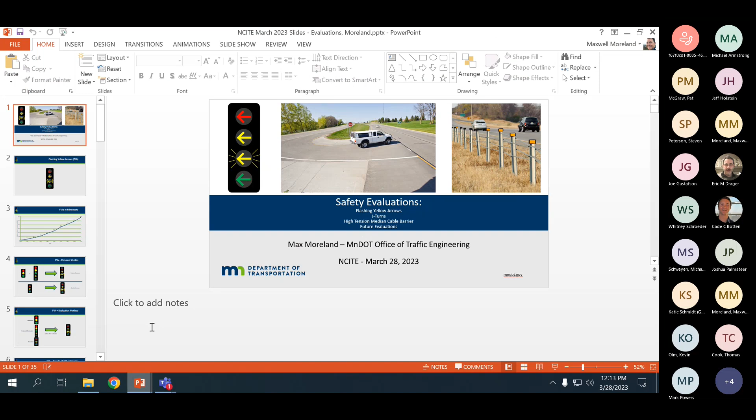Let me know if people say they can't hear it. That's me. All right, I was told no one over there could see, so I'm going to stand right here.

Max Moreland, MnDOT Office of Traffic Engineering, safety section. I'm going to talk about some safety evaluations we've done recently - how we've evaluated the safety of flashing yellow arrows, J-turns, high tension median cable barrier, and some other evaluations we have ongoing and upcoming. It's going to be kind of a rapid fire, just going to go through a bunch of these real quick-ish.

First, flashing yellow arrows - everybody knows what this is, it's a yellow arrow that flashes. Aptly named device, used for left turn phasing, can provide a little more flexibility than maybe a 3-section head can. The thought is that it might have safer operations because it gives clearer messaging to drivers. Green means go, but not always if you're turning left, so it's very confusing for small children. Green means go, flashing yellow arrow means whoa, take it easy.

FHWA authorized the use of flashing yellow arrows in 2009. Obviously, a ton of them have been put in throughout the state.

These are just the ones on MnDOT intersections since then. About half the ones we have are in the Metro District.

Some previous studies have been done on the safety impacts of flashing yellow arrows, and those found two things. Depending on what the signal phasing was before the flashing yellow arrow went in, that would tell you what's going to happen to your crashes. If your previous scenario was just a 3-section fully permissive or a 5-section permissive protective and you went to a flashing yellow arrow, you would see crashes decrease. If you went from a fully protected to a flashing yellow arrow, you would see crashes increase. That kind of makes sense. If you go from a more restrictive signal, where you should only be turning left on green, to giving drivers the option to turn left when there may be oncoming traffic, things are going to happen. When you give people more choices, I guess it's more likely that crashes are going to happen.

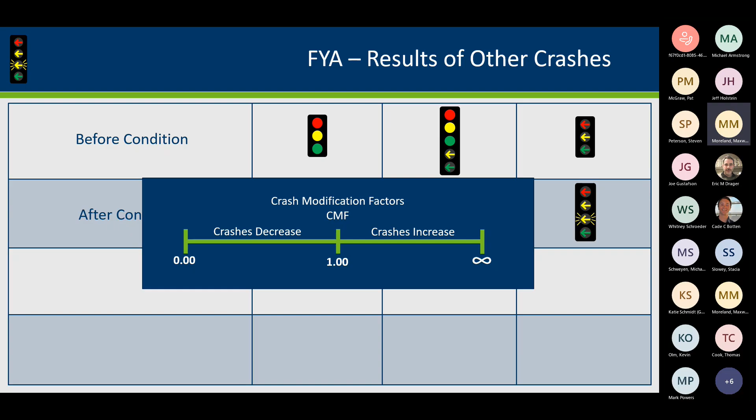So purple pavement, of course, has a CMF of 0.5. That means if you change your road to purple pavement, your crashes are going to get cut in half. That was a fake example. Turquoise pavement has a CMF of 2, which means your crashes are going to double when you change your road to turquoise.

So for left turning crashes, that's the target crash, kind of our focus with the flashing yellow arrow, because we're focusing on those left turning vehicles. The CMF for that is less than 1 when the before condition was the fully permissive or permissive protected, and greater than 1 if it was fully protected. Again, that makes sense, that's kind of what's been seen elsewhere. If you're going from a less restrictive to a more restrictive signal head, you can expect the crashes to drop. If you're going from more restrictive to less restrictive, you can expect crashes to increase.

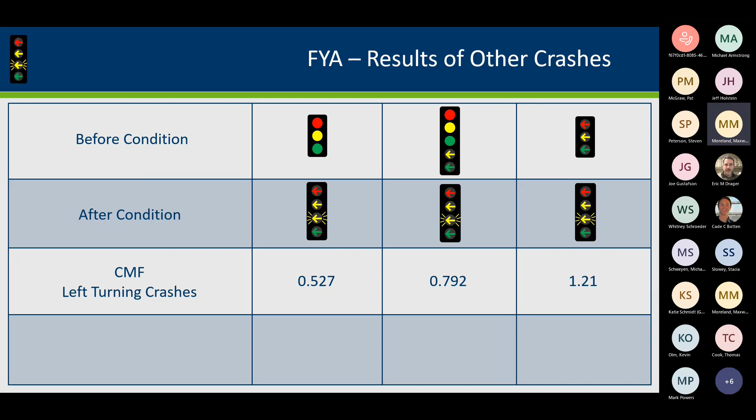Interestingly, with the 5-section head, operations are kind of similar. You had that protective option, you had the permissive option, but I guess the difference is you're not yielding on green, you're yielding on that flashing yellow arrow. So we are seeing a drop in left turning crashes there too. That does seem to indicate maybe there's a clearer message to drivers out on the roads. I know we hear a lot differently from some people—they complain flashing yellow arrows are confusing—but the crash data seems to show that maybe they are sending a clear message to people out on the roads.

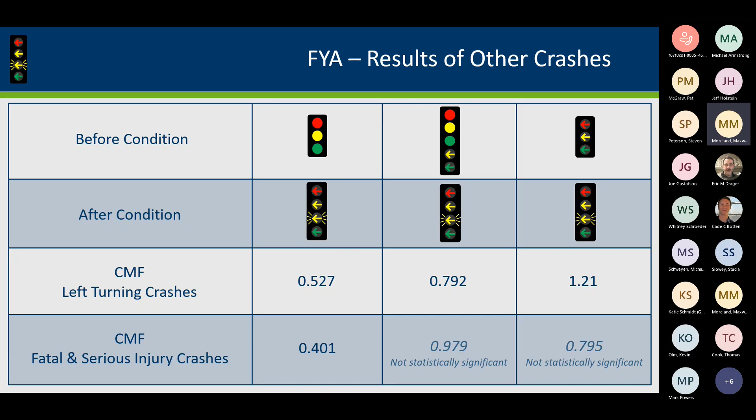And then for fatal and serious injury crashes, we did see drops in CMFs across the board, only statistically significant for the before condition being fully permissive. Those drop pretty significantly, which makes sense, if we're seeing a drop in left turning crashes, that we'd see a drop in fatal and serious injury crashes. You don't want to be in a crash involving a left turning vehicle—head on, angle—usually not a good type of crash. So if we see a drop in that, it makes sense we're going to see a drop in fatal and serious injury crashes. That's the quick summary of this evaluation.

If you go from fully permissive or protective permissive to flashing yellow arrow, your left turning crashes are likely going to drop at the intersection. If you go from fully protected to flashing yellow arrow, left turning crashes are probably going to increase.

So the full report is available. Just Google MnDOT traffic safety reports. There's a web page with every report that we do on there, and this is one of them.

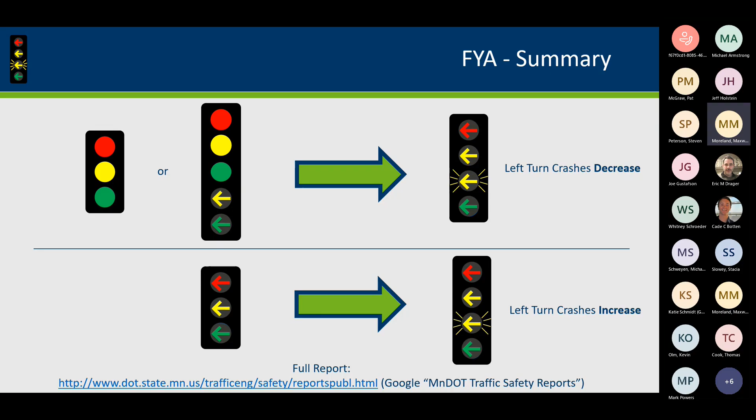All right, so we're going fast here. Next is J-turns. We call them J-turns now, not RCIs, reduced conflict intersections, not R-cuts, not whatever else. All our eggs are in the J-turn basket. So call them a J-turn wherever you go, because it was getting confusing having all these names for this relatively new intersection.

So these are an intersection, a specific intersection type on high-speed multi-lane expressways with wide medians.

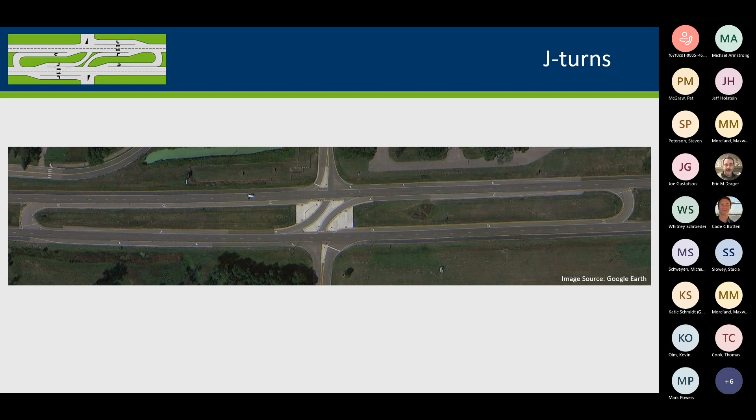The goal of a J-turn is to prevent severe angle crashes. So here's an intersection before and after a J-turn was installed.

You can see with the J-turn there's some obvious differences as far as the movements that vehicles can make. Mainline can still go through without stopping. They can still turn right. They can still turn left if the left turning bays are provided.

They might not be. Some J-turns just have the U-turns. But then minor street, everyone has to turn right. So if you want to go to the right, you turn right. That makes sense. If you want to go through or left, you've got to turn right and then make a J-turn.

Turn your head, it looks kind of like a J, the way the line goes. So if you want to go through or left, you got to turn right, go to the U-turn, come around. So the side street traffic is not making those straight through or left movements.

So they're not opening themselves up to be T-boned basically by high-speed traffic. You're only dealing with one direction of mainline at a time. It's a little bit easier to do.

You do have further to go, but we're seeing on average travel times aren't really changing that much, because you don't need that magical gap in both directions of mainline. You just deal with one gap at a time and you can get through pretty smoothly.

At the conventional intersection, some people would try and make a two-stage crossing here, but we saw a lot of issues at this. There's a lot happening at that point in the intersection. Sometimes people would hang out a little too far or other vehicles would try and turn, so it's messy. The J-turns kind of clean that up, simplify it a little bit.

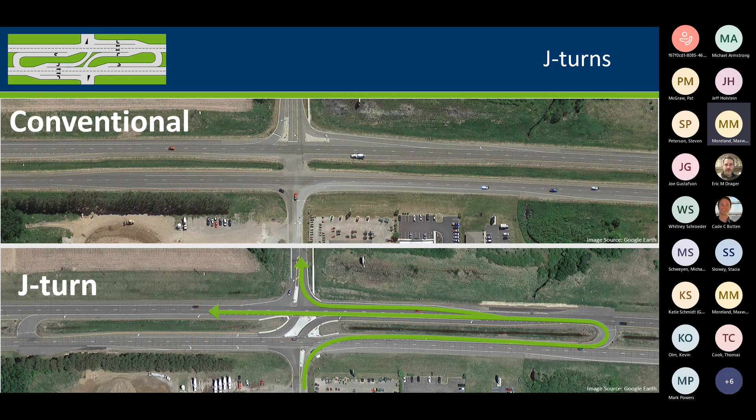The other alternative to a J-turn is an interchange, but that costs a lot of money. That takes a lot more land. You can put 10 or 20 J-turns out for the cost of an interchange. So with the J-turn we can really get more bang for our buck. Limited funds to go around, so we can put a lot more of these out than just one interchange.

The first J-turn in Minnesota was installed in 2010. Now we have over 80 of them on MnDOT roadways. Over 20 were built just last year, kind of all over the state. There's a mix of 3-leg intersections and 4-leg intersections.

We do have one that's signalized on Highway 65 in East Bethel, I think. Yes, signalized, that actually has dual U-turn lanes on it. Some of the J-turns have both of the mainline channelized lefts. Some just have one, some have none. Everyone's got to go to the U-turns.

The U-turns can be as close as a few hundred feet. Usually they're 700 or 800 feet away from the minor street. One of them is almost a half mile, just because there's a bridge and some other things.

Mainline ADTs that we have these on range from just a few thousand, all the way up to over 40,000 on the mainline. And side streets are between just a few hundred vehicles a day, all the way up to 7,000 vehicles a day. So there is a wide range of locations that J-turns seem to be operating decently on.

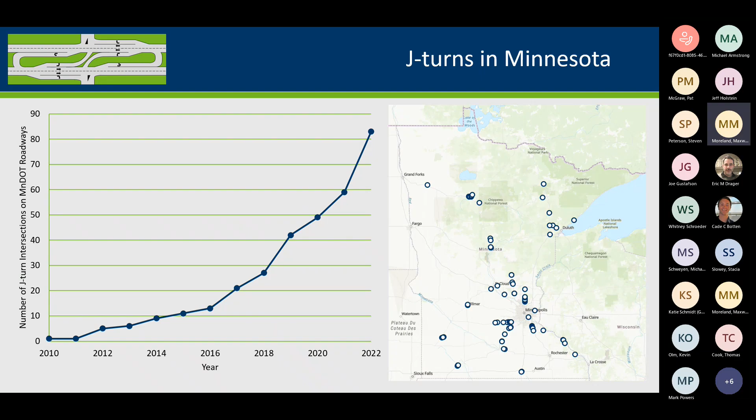So the goal of J-turns is to eliminate those high-speed angle crashes. The purpose of our evaluations was to see, well, is that happening? Are we seeing less angle crashes? Are we seeing less severe fatal and serious injury crashes?

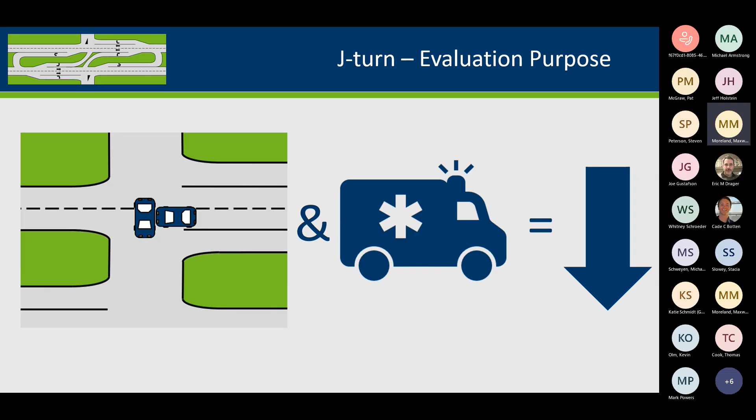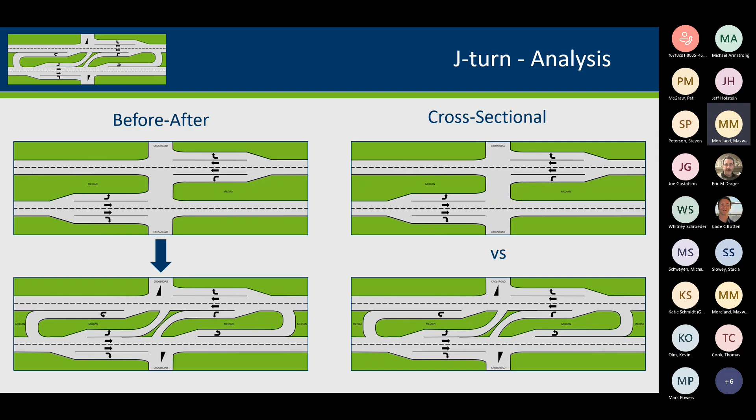So we did this evaluation in-house in my office. We did two types of evaluating: before and after, looking at locations that had a J-turn and comparing crash rates before and after it was installed. Then we also took those before and after results and compared them cross-sectionally to comparison sites that don't have J-turns installed, just other high-speed expressways with side street stop.

They're doing their job out there. Total crashes maybe dropped a little bit, not really, not a big drop in all your crashes, so it's not going to fix every issue you have out there. But we're seeing more of a severity shift, getting rid of some of these more high severity crashes, and there might be some less severe crashes, which from a safety perspective is okay.

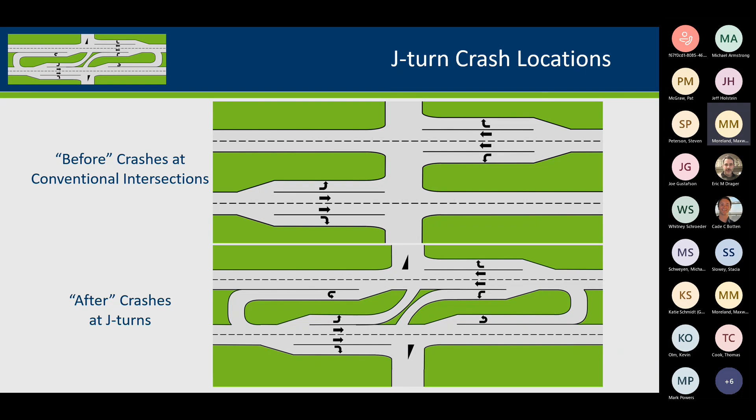So we're still having crashes at J-turns. I just want to talk real quickly about what crashes we are seeing out there. This would just be a comparison of the crashes from our before-after analysis. On top is the crashes we had in the before period, on the bottom is the number of crashes in the after period, for just a few crash types. These are just crash counts, not rates, so don't take this as gospel. This isn't a perfect comparison, but our locations are the same, the time periods before and after are the same, so it just kind of paints a picture of what we're seeing out there.

Another place where we're seeing a decent number of angle crashes is that mainline left turn. A lot of the J-turns still have these channelized left turns, which kind of still opens people up to being hit by a vehicle as they make that left turn movement, similar to the conventional intersection. So we're seeing similar numbers there. J-turns don't have to have these channelized left turns - it could be eliminated, so you'd eliminate this crash type, and anyone wanting to make a left from the main lane would have to use the U-turn.

Slightly more inconvenient - J-turns are sometimes a hard sell for a local community. Even though we have a lot of them and they're working well, it's different. So to get people on board with the J-turn in their community can be a challenge sometimes. So it could be a compromise to keep these left turns in. It has the appearance of less inconvenience for drivers, but it does pose a safety risk. So let's keep that in mind. You can get rid of them all.

But the biggest change we're seeing is side street vehicles attempting throughs and lefts nearly eliminated - those angle crashes. In the before period, over 100 crashes of this type; in the same amount of time in the after period at the same locations, we had 2. So people on the minor street at a J-turn are supposed to turn right. Not everybody does - some will try and take a shortcut, go the wrong way through the left turn. Sometimes people are maybe a little confused about what's going on, so we still do see a couple of crashes of that type. But if you remember another thing about what I talk about, it's that we're seeing a near elimination of this type of crash, which is a severe crash.

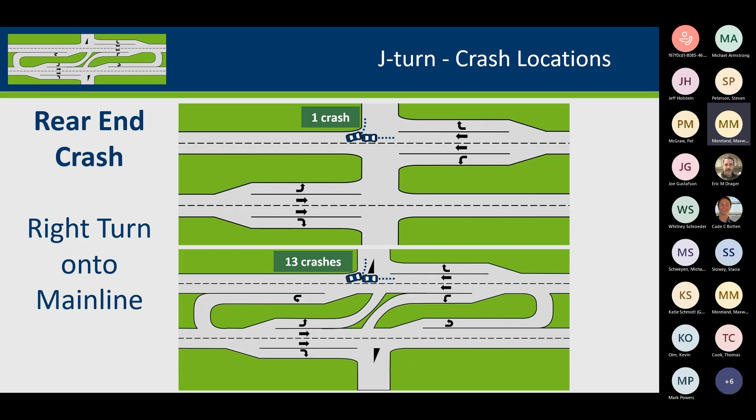With the J-turn, you're only dealing with one direction of mainline traffic at a time, so you're maybe less likely to be scanning, looking for gaps in both directions. It seems more people are just kind of looking downstream, assume the car ahead of them went when they didn't, and then they inch forward and crash into them. So these are all low speed, low severity crashes. We could have 5,000 of these crashes, and I think it's okay.

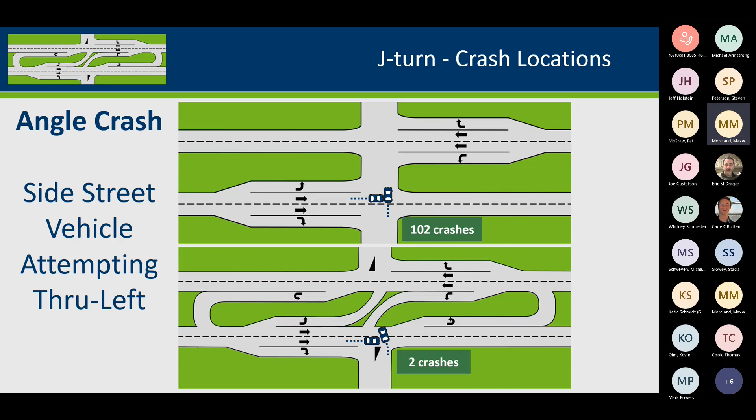Because we're getting rid of these crashes, to get rid of these and have a billion of these, whatever, that's fine. It might make the J-turn sell a little bit harder, but we're not seeing any injuries from this type of crash. But this is something that's kind of causing our total crashes to not be eliminated or not drop much at the intersection.

So summary: angle crashes, fatal and serious injury crashes at J-turns are going down. They're working as expected, which is good. The reports are on the same page, just look for MnDOT traffic safety reports.

All right, go fast. High tension median cable barriers is the next one I want to talk about. These are barriers made out of cable under high tension in the median - metal ropes supported by posts in the median. The goal is to prevent those cross median crashes. As of now, we have 774 miles of these throughout the state on MnDOT roadways. So a lot of them, I'm sure you've seen some of these driving around.

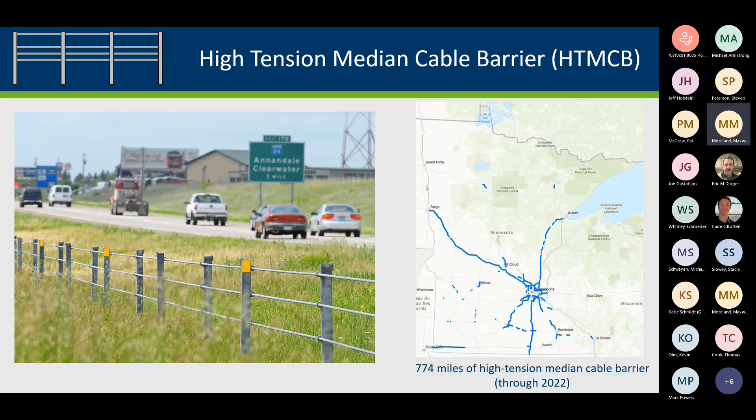So the goal is to prevent cross median crashes. When a vehicle enters the median, that cable barrier is there to stop them from going into oncoming traffic. Those cross median crashes are severe - they're head on, they're high angle, they're high speed crashes. They're never good, so you don't want any of them. So the cable barrier is there to stop that.

So when the barrier is there, it'll catch the vehicles before they can enter that oncoming lane. It's a flexible barrier, so it has greater deflection than a rigid concrete or semi-rigid guardrail barrier. It transfers a little more energy away from the vehicle into the cables, resulting in a lower severity of crash when people hit these barriers. And the cables kind of dig into the vehicles - they don't just slingshot the cars back into the lane they came from.

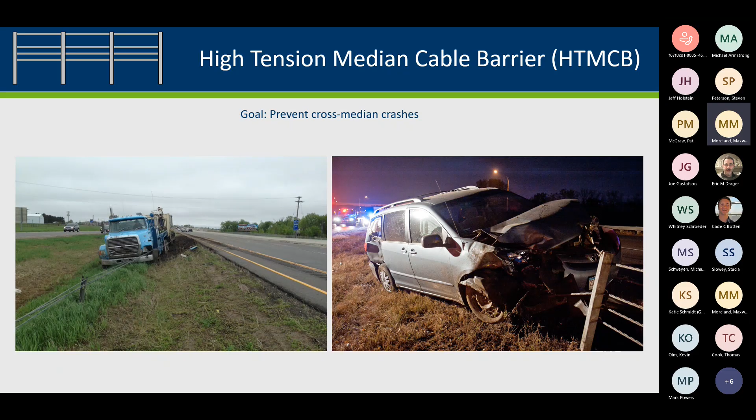When a vehicle hits a cable barrier, they're going to get snagged, they're going to get snarled. You can kind of see they'll get stuck in the barrier there. Once they get there, they're generally going to stay there, which is a nuisance from a maintenance perspective - there's more work to be done, but it's keeping the vehicle in the safest spot right there.

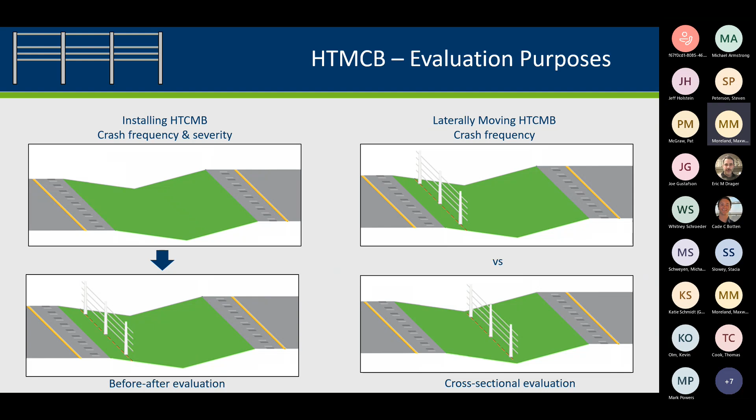So our evaluation looked at two things. First was what happens to crash frequency and severity when you put barrier in a median that did not have barrier before - we did a before-after evaluation looking at that. Then also what happens to crash frequency when the barrier is in different locations in the median - if it's right up on the shoulder close to vehicles, or way down in the middle of the median further from vehicles. So we did a cross-sectional evaluation comparing locations with different barrier offsets against each other. This evaluation was done by HDR with our traffic safety evaluations contract.

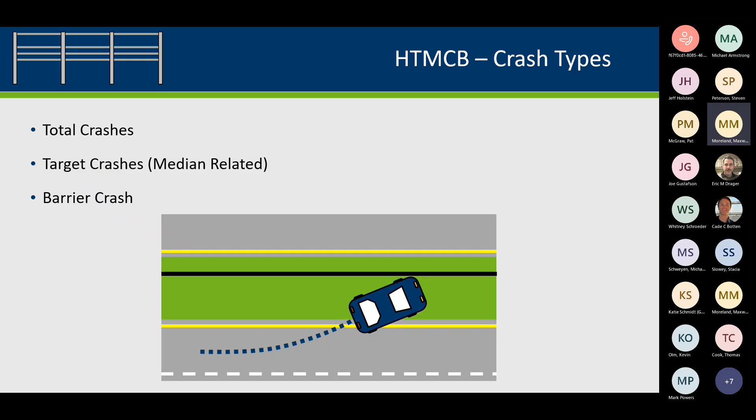We grouped all the crashes into three bins: total crashes, any crash happening on the segment whether related to the barrier or median or not; target crashes, crashes that involved any vehicle entering or crossing through the median; and barrier crashes, any crash that involved the vehicle striking the median barrier.

So the results of installing new barrier on a location that did not have it before: for total crashes, we're seeing a pretty healthy drop in fatal and serious injury crashes, same with fatal and all injury crashes. So it does seem that putting in that barrier prevents some of those cross-median severe crashes. Overall, total crashes are going up - CMF's greater than 1. You're putting something in the median that wasn't there before, there's something for people to crash into, and moths to a flame, people are going to hit it. So there's going to be more crashes than there were before. That's a nuisance, that's a pain, but we are getting that drop in fatal and serious injury crashes. So everything's a trade-off here - I guess I'd say it's worth it from that perspective.

If we look at just the target crashes - crashes that involve a vehicle going into the median - there's a big drop in fatal and serious injury crashes. CMF of 0.377, that's a 62% decrease in fatal and serious injury crashes. So if you drive your vehicle into a median and there's a barrier there, you're 62% less likely to be killed or seriously injured. There's a big drop in all injury crashes, and again a big increase in all crashes because there's something to hit that wasn't there before.

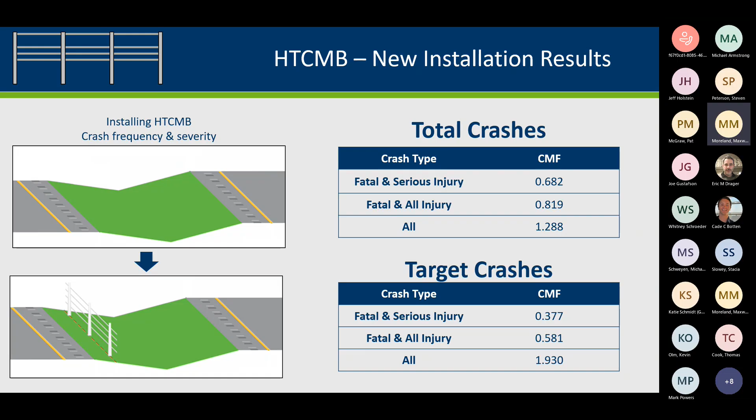But that's a trade-off we're seeing good drops in fatal and serious injury crashes with these barriers, which is why we have so many miles of them throughout the state.

The second portion of our evaluation was looking at how changing the offset of the barrier, the distance from the vehicle travel lane, changes crash frequency. So we've got three lines and three equations, one for each crash type: total crashes, target crashes, and barrier crashes.

If we just look at this dark blue line, that's total crashes. As the offset increases, the CMF decreases. So as the barrier gets further away from the travel lane, there are fewer crashes. That seems obvious, we kind of knew that, but now we know how fast that rate changes for our different crash types.

So now that we know the expected crashes at different offsets, we can develop CMFs. That's what these equations and this table give us numbers for, so we can do comparisons. If we're looking to place the barrier, we can look at different locations in the median, compare estimated crashes at different locations, do a cost-benefit analysis, and see what the best spot for putting the barrier would be.

So we're just making it more complicated. You just want to put out a barrier, seems simple, but no, you've got to do math. Hopefully this will make it a little bit safer out there, with fewer crashes depending on where you want to put the barrier.

This evaluation did not analyze ground slopes of medians or anything like that. Based on the slope of the median, there's only certain places you can put the barrier, because it's possible it's in the wrong spot. A vehicle leaving the road could shoot right over the barrier, or compress down and go under it, overriding or underriding the barrier. So there's only certain spots you can put a barrier.

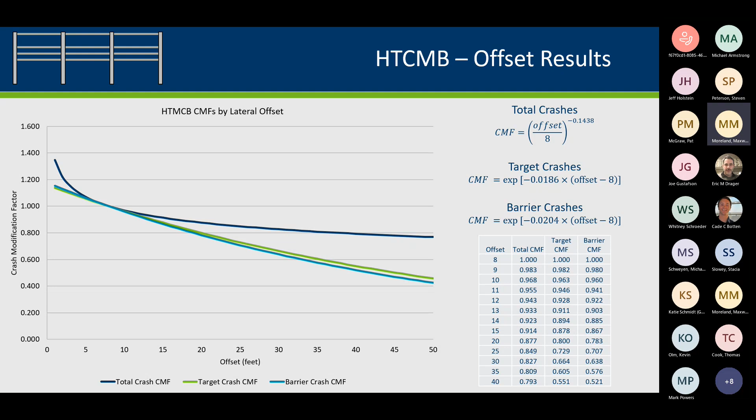These calculations can help you pick the best spot, and even tell you if it's worth regrading the slopes. It's worth doing that extra work if you're going to see significantly fewer crashes.

This was just a quick example of how to use those numbers. Say you had a barrier that's 10 feet away from one side, 50 feet from the other side, and a 60-foot median on this fake road. You could estimate with that volume and this length of segment, in 10 years you'd have this many crashes. And if you move the barrier, you can just estimate how many crashes you're going to get.

So I'm not going to run through that right now, but you can read about it on the MnDOT Traffic Safety Reports webpage. So that's high tension cable median barriers.

Now, just a couple minutes left. I want to talk quickly about some other evaluations we have ongoing. Just a teaser, I don't have any results, so don't ask me about these. These are things we're working on now, stuff you'll see upcoming in the near future. But hold us accountable, because now I've mentioned that we're working on them.

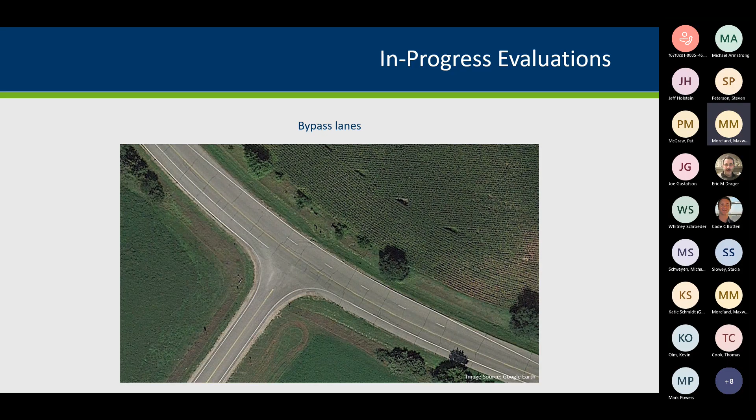First is a bypass lane evaluation. Mara started this, I believe, when she was in our office. Then when she left, it just gathered dust. So we're going to dust it off and get it out there.

What are the crash impacts of bypass lanes in urban sections? This is a wide-reaching scope of a project, comparing 2, 3, 4-lane undivided, and 4-lane divided urban facilities. What kind of safety performance are we seeing on these different types of roads in urban areas, with and without bypass facilities, different speed limits, different ADTs. So it's kind of a messy project, but hopefully we'll get some results out of that.

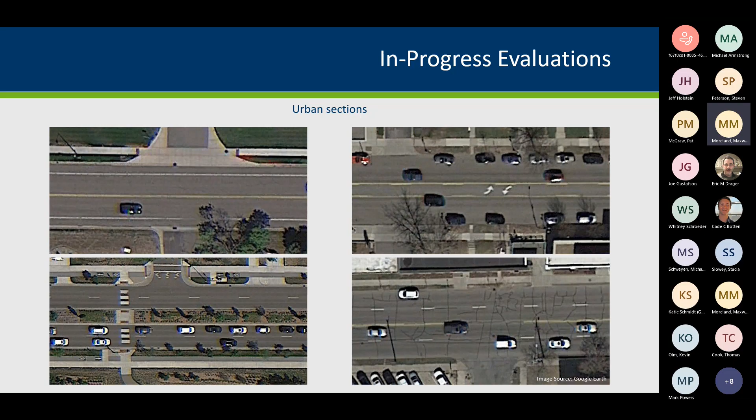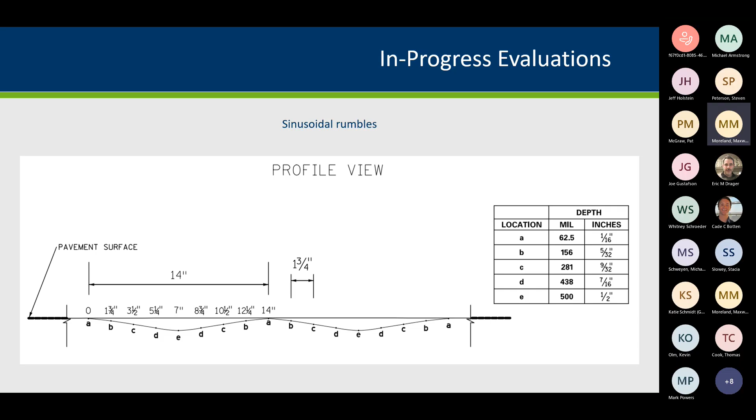We've been putting a lot more sinusoidal rumbles out. Those rumble strips are quieter when the vehicle hits them. So we want to see, now that we have a bunch of them out there, are they as effective as the rectangular rumble strips or not? That one's just getting started.

An update to our 55 to 60 mile an hour speed limit evaluation. Between 2015 and 2019, per legislative request, MnDOT studied a whole bunch of 55 mile an hour speed limit roads to see if they should be raised to 60. As you can see, red remained 55, green raised to 60. So thousands of miles of road, we did change the speed limit on.

So we did a study a few years ago looking at what the speed impacts were. Not much, the 85th percentile didn't really change, average speed changed a little bit. And then what were the crash impacts? They were kind of minimal, but we have more years of data now. COVID happened, so that threw another wrench in everything. So we're going to take another look at that and see how operations are on those roads.

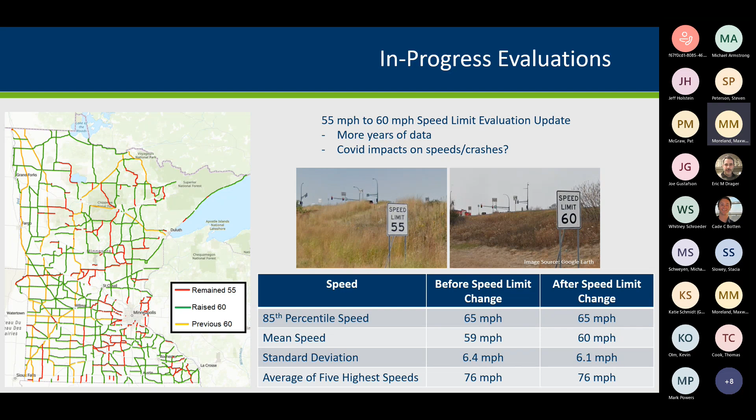Signal backplates with retroreflective borders, the yellow strip on signal heads. In 2019, we put these out on about 100 MnDOT intersections. FHWA says that's a proven safety countermeasure.

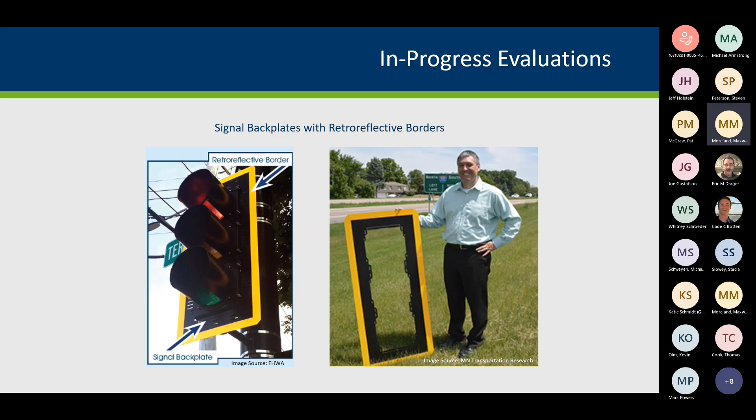The thinking is it'll just get drivers' attention a little bit more. Say, hey, look at me, there's something up here to pay attention to. So we've had some of those out for a few years, and we're going to take a look, see if they're working from a crash perspective.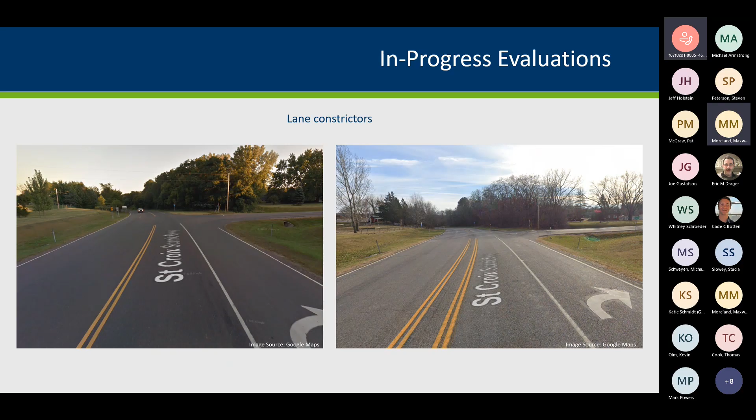Lane constrictors. We put a bunch of these out in 2019 as well, on side street stop control intersections. The main line has a little painted buffer, with some rumble strips down the middle to signal to drivers on the main line as they enter the intersection that their lane is being constricted. One of the goals is to get people to try and slow down, improve safety at the intersection. So we put a bunch of those out, and we'll take a look at that, see how they worked.

And then we're going to do an update to J-turns. We have a lot more locations, a lot more years of data, so we'll do an update to that. And that's all I have.

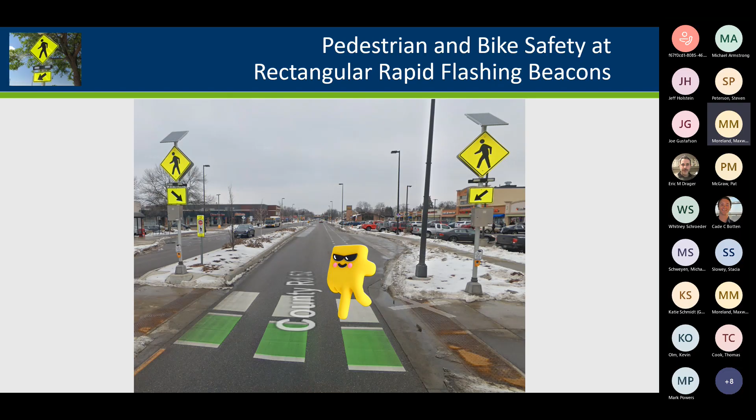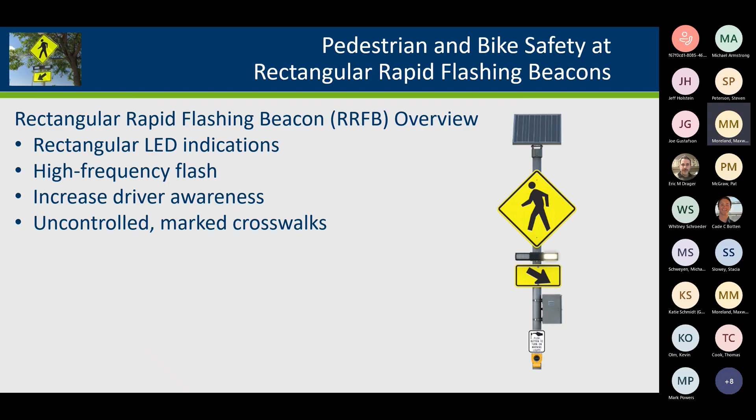So I think y'all are pretty familiar with an RRFB. This is actually the RRFB itself. That bar right between the warning signs has a high frequency flash, their LED indications. They're supposed to make drivers more aware of the pedestrian crossing. They're really intended for uncontrolled marked crosswalks.

This is my first foray into animation with PowerPoint slides, so there's more, and it's out of order, but yielding rates and safety benefits. Pedestrian crashes, according to FHWA, went down after the installation of these. Yielding rates have ranged from 98% to 19%, and of course, that was in Texas. That also varies by speed limit, number of lanes, time of day, and then the crossing distance too.

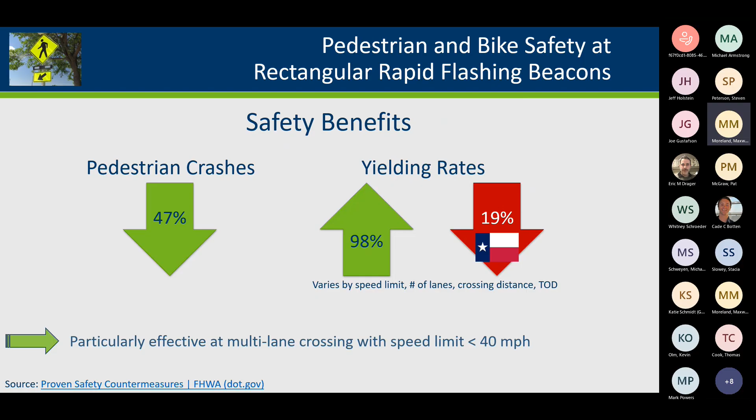I've seen RRFBs at 5-lane undivided sections. It seems like a horrible application for that technology.

These have kind of come from an interim approval that was requested by FDOT back in 2008. And then eventually there was a claim or a patent on the technology, a big MUTCD no-no. My understanding is that they terminated IA-11. A private company bought the patent and then vacated it so it could be in the public domain. That's the last I heard. Anyways, RRFBs are back in the public domain. They have a new interim approval, and they're probably going to be in the MUTCD soon. But for now, that's the interim approval we're working with.

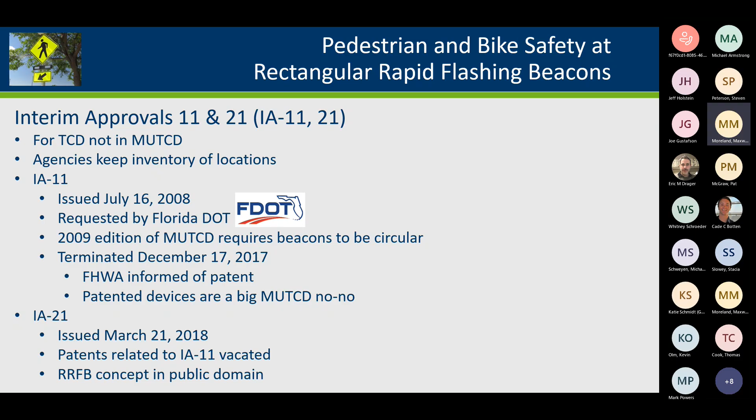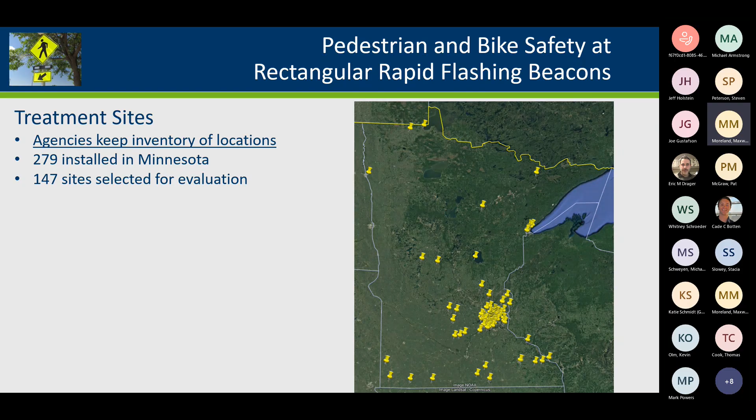And one of the keys about interim approvals that helps with this evaluation is agencies have to keep a record of locations. So we had 279 of these to pull from. We picked 147 sites for the evaluation. On the map, they're kind of all over the state, more concentrated in the metro, but we have a pretty good mix of outstate and urban areas.

Control sites, we tried to match the same number, really similar characteristics. One of the keys was intersection type where applicable, and then the presence of pedestrian signing and markings. So we wanted to compare these not to totally unmarked crossings or unsigned crossings, but ones where the signing and markings are there, but not the RFB.

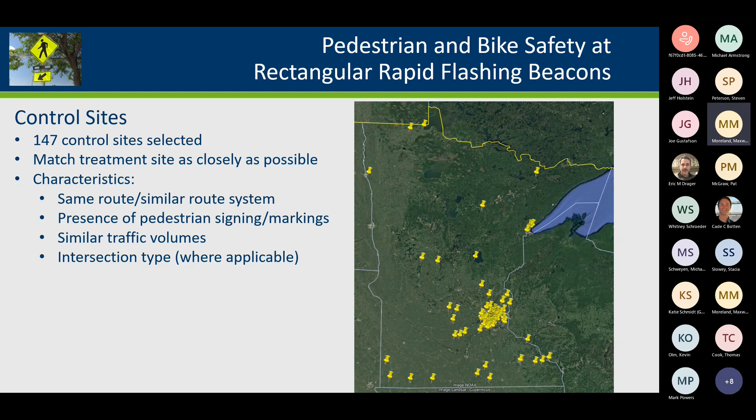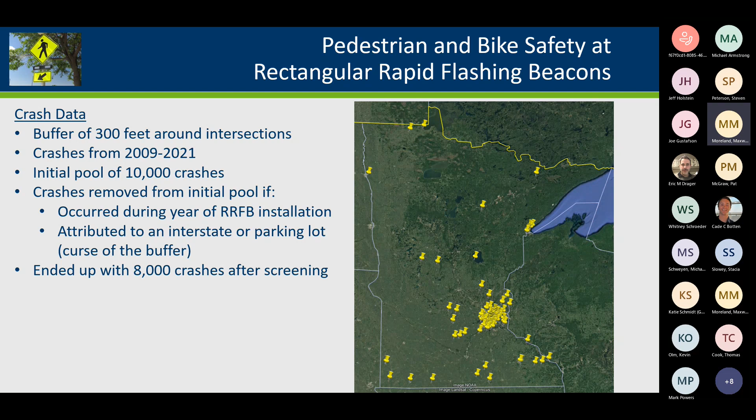So for some of the crash data, we just used a 300-foot buffer around intersections. One of the curses of that is that we grabbed some crashes that were in parking lots or on the interstate. Obviously, there are no RRFBs on interstates. So after we screened those out, we had about 8,000 crashes left to pull from.

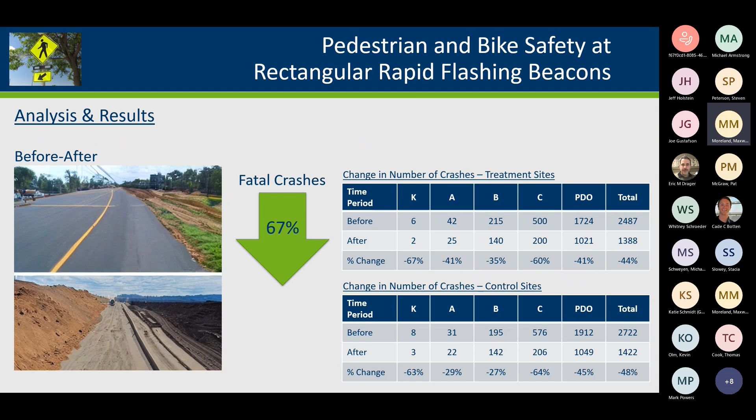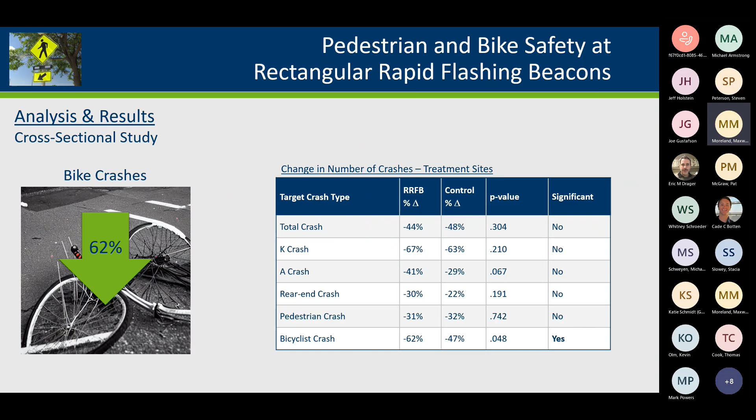But the biggest finding was that at the treatment sites, fatal crashes went down by 67%, and that's all users, not just pedestrians. Seems weird that we would include all users, but that's what happened. Bike crashes were the only statistically significant reduction, though. Those went down by 62% compared to 47% at the control sites. That's another OpenAI image of a bike crash.

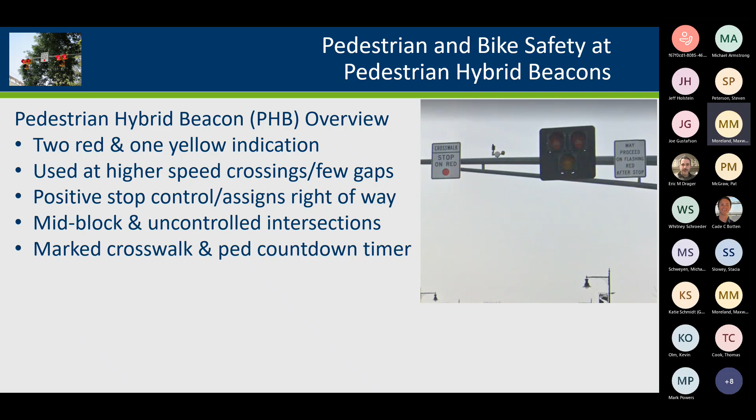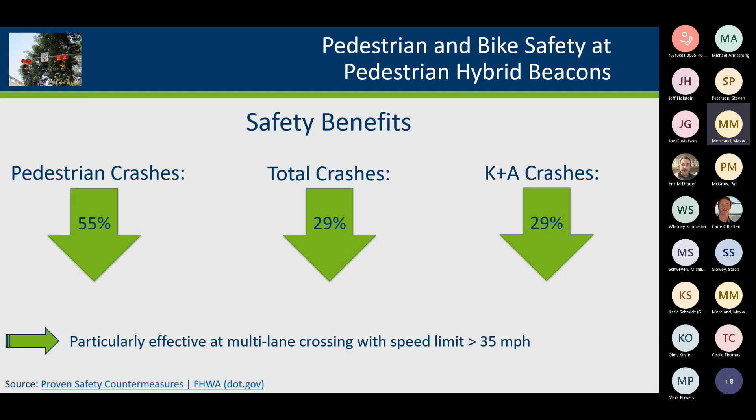Some safety findings: total crashes and K+A crashes went down by 29% according to FHWA. And then you saw a 55% reduction in pedestrian crashes. They're really effective at multi-lane crossings where the speed limit is greater than 35 miles an hour.

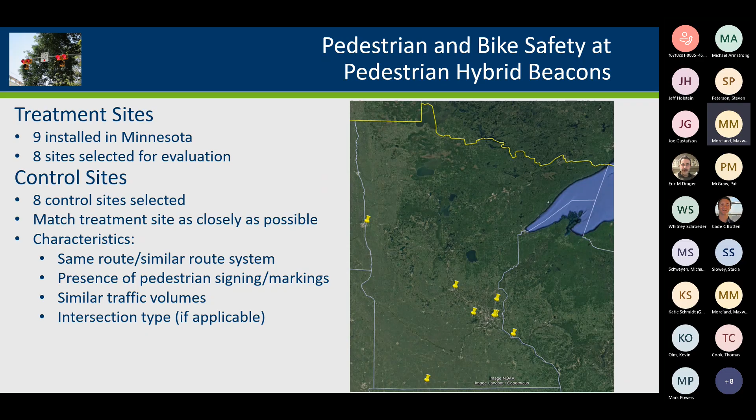Kind of the same story with PHBs that we did with RRFBs. We took all the sites we could find in the state, pulled crash data, and then we tried to match treatment or control sites as closely as possible. We ended up with 8, so we used the same pool of crashes. I kind of brushed over that the first time, but we just grabbed RRFB and PHB sites in the same data set, separated them out later. And then we omitted the year of installation also, since there's no need to include those crashes in the before and after analysis.

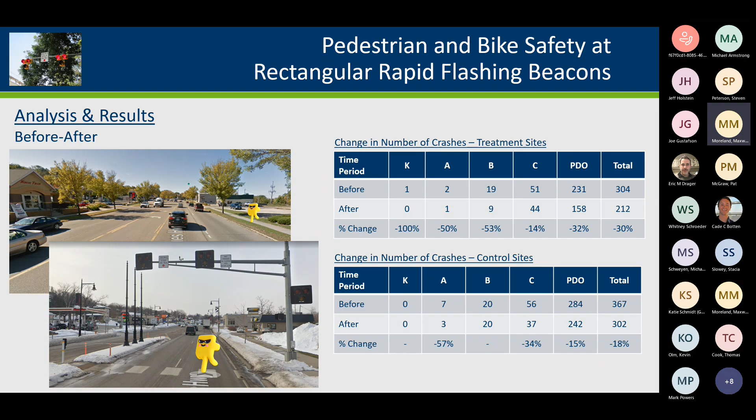So here's some of the results. I think the most interesting one is minor injury crashes at the treatment sites went down by about half, and at the control sites didn't change at all. This is a summary of what was statistically significant again. The weirdest one was rear end crashes went down more at the treatment sites, which usually you install a signal, you expect to see rear end crashes jump a little bit. I thought it'd be the same for hybrid beacons. Not in our study, but it still could be.

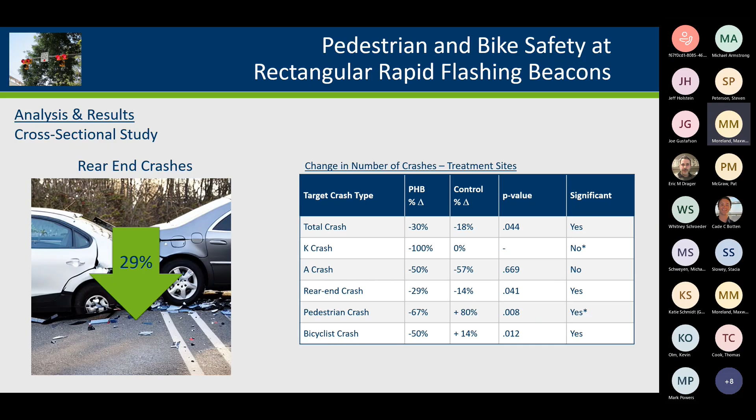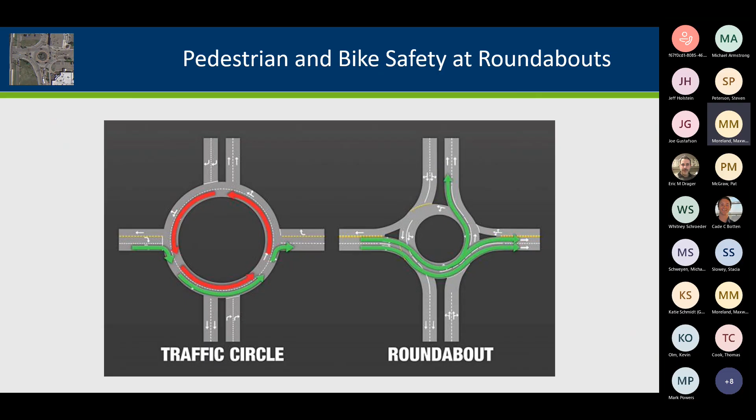So, pedestrian and bike safety at roundabouts. I included this for TZD. Don't take it personally, you all know what a roundabout is versus a traffic circle.

National research, these are the two that I like to go to a lot, NCHRP 672 and the Highway Safety Manual. Both of these found really large reductions, almost 80% in fatal and serious injury crashes. And that says injury crashes, but if a pedestrian gets hit, it's probably going to be more on the serious side anyways.

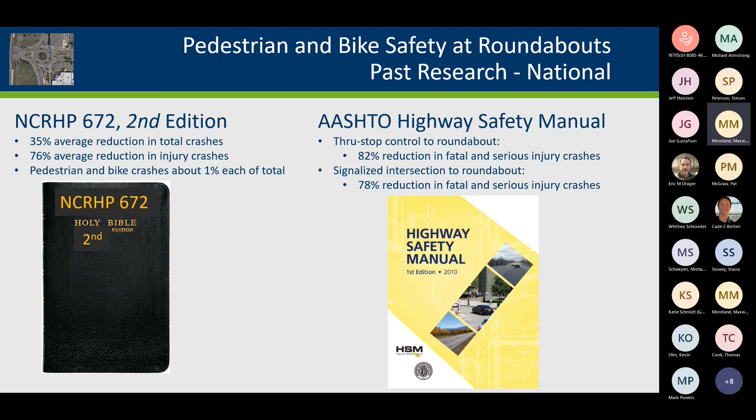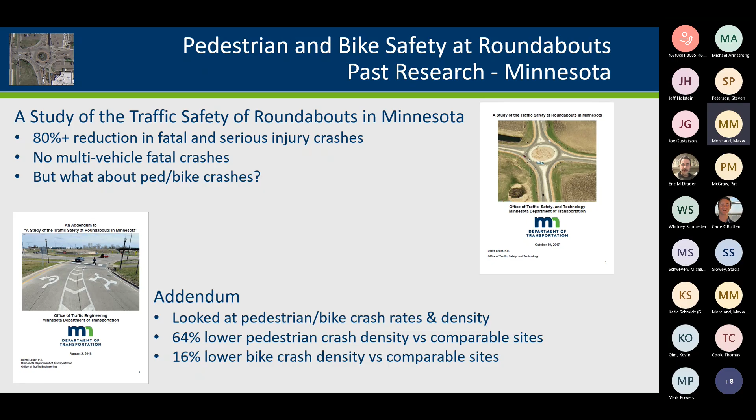Derek Leuer did these two things. This was MnDOT's first foray into a big roundabout study, I would say. He found an 86% reduction in fatal and serious injury crashes in his study at all the roundabouts installed in the state at the time. And no multi-vehicle fatals, which I think to this day is still true at all the roundabouts. But the one thing it didn't really look at, he tried in this addendum to look at ped and bike crashes, but he grabbed all the sites whether they have ped crossings or not, so it was kind of a shotgun approach.

And I think a lot of that comes down to a perception that a roundabout just has a yield sign, whereas a signal has the hand and the walking man. It tells someone when they're supposed to stop, it tells them when they're supposed to walk. It's very clear what everyone's supposed to do, whether they follow all that or not. And then the stop sign is the stop sign - everyone thinks they work 100% of the time.

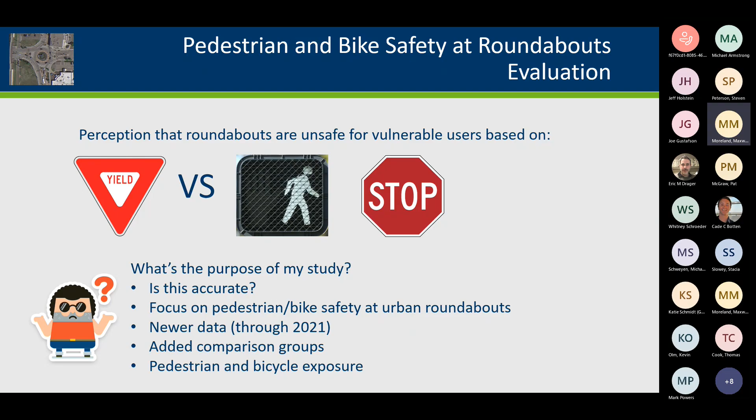So some things I wanted to look at were: is this an accurate perception? I wanted to focus more on urban roundabouts where we expect to see more users. And then I started this in 2020, but as COVID went on and pedestrian crashes kind of jumped, it got really interesting to see what was happening at roundabouts versus other locations too.

And then exposure, which gets me to my digression about space. This is Eric DeVos' slide, I can't take credit for it. Basically it uses - and thankfully Sonia's here too.

There's 19 factors, and I think they all get scored 0 or 1 - either a site has them or it doesn't. Based on these factors, the state is divided into about 500,000 hexagons, and each hexagon gets a space score based on these criteria.

It's out of 100. Over 50 is a high score where you're going to see probably more pedestrian and bike activity. Below 50 isn't a reason not to do something, but you're probably not going to see as much activity in those areas.

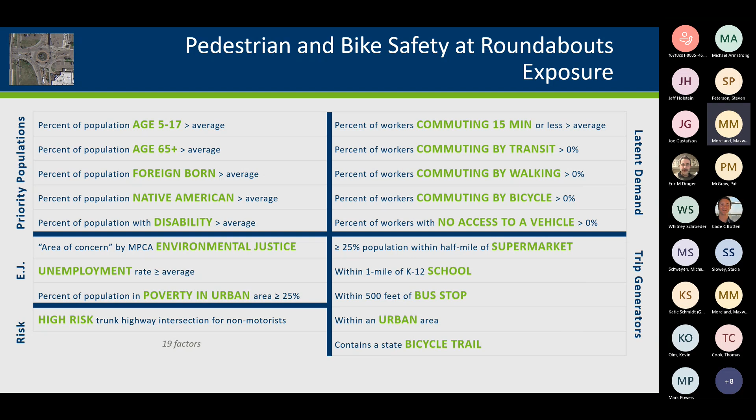Here's one of the fun counterintuitive things. If you're scoping a project, you'd think Mankato's where you want to go for peds and bikes - it's got the most people. But space would tell you that you might want to spend more time in Faribault instead, since that's where more of the factors are present that contribute to ped and bike usage, and maybe more treatments are needed there.

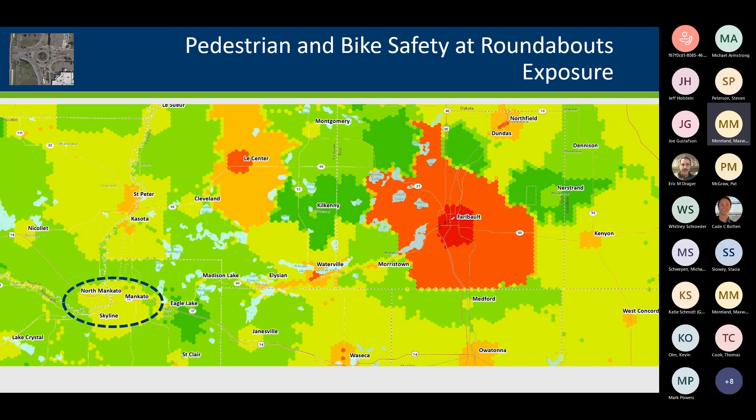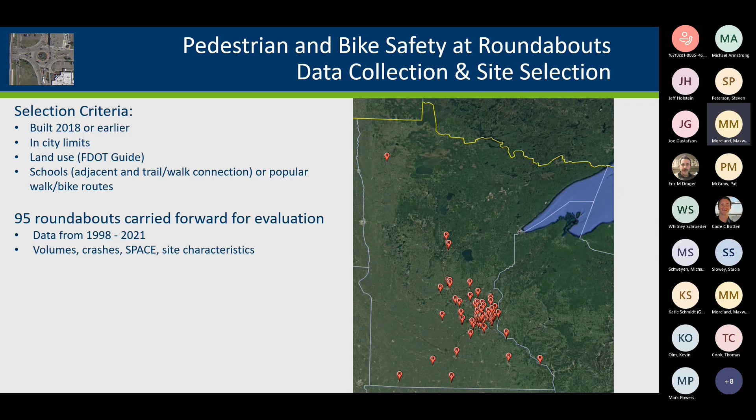Back to the study, data collection. There's a map of all the roundabout sites, and again it's heavily concentrated in the metro - I think that's just where most of the roundabouts are. I went all the way back to the 90s for my crash data, which was kind of a throwback jam. Then I grabbed volumes, crashes, space scores, and site characteristics for all of them.

For traffic, the control sites I used traffic signals, through stops, and all-way stops, selected based on trying to match locations and volumes when selecting control sites, at least for the signals - that's a harder job to do with stop control sites. We had to limit it to basically the 4 largest highways in the state because I'm not a crazy person. I don't want to look at MSAS routes to try to find treatment or control sites for through stops.

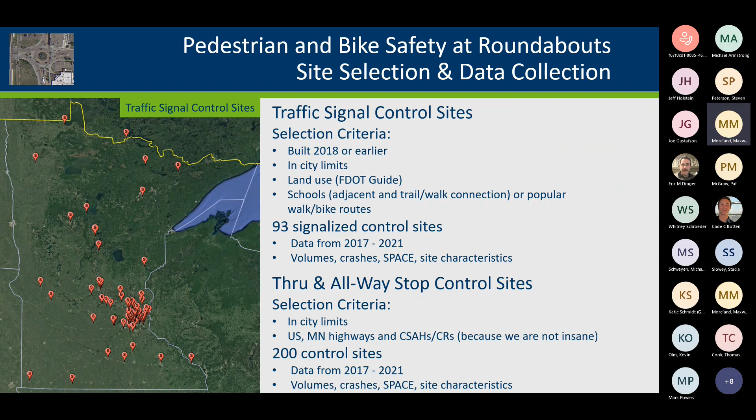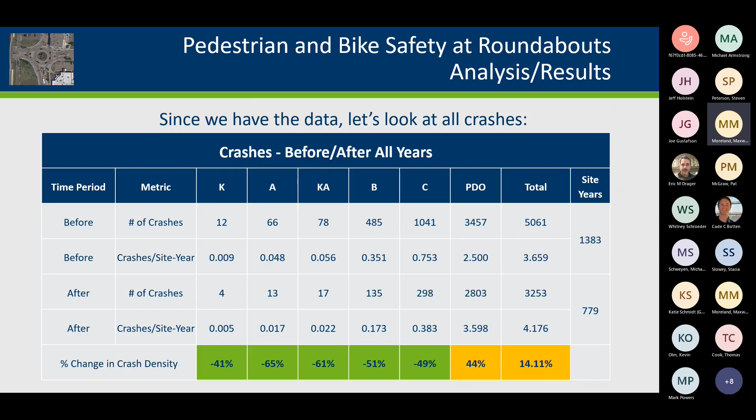Summary of findings - okay, good on time. Before and after for all crashes, pretty good. Just like Derek, I saw about a 60% reduction in K&A crashes at my sites, a 44% increase in PDO crashes, and a small increase in total crashes. But like Max said with his J-term presentation, I'll take 1,000 of these instead of 1 fatal at any intersection.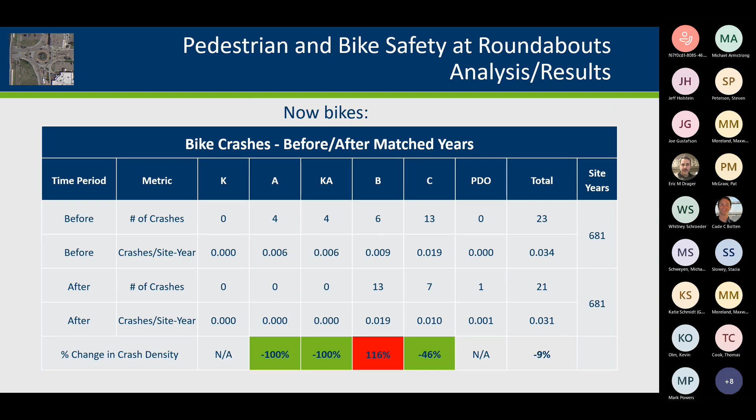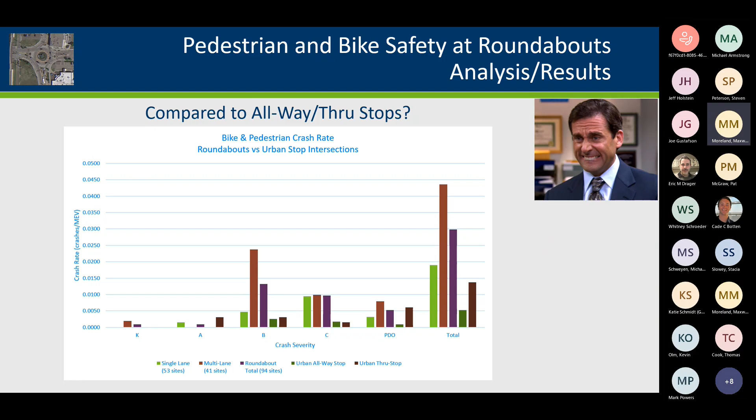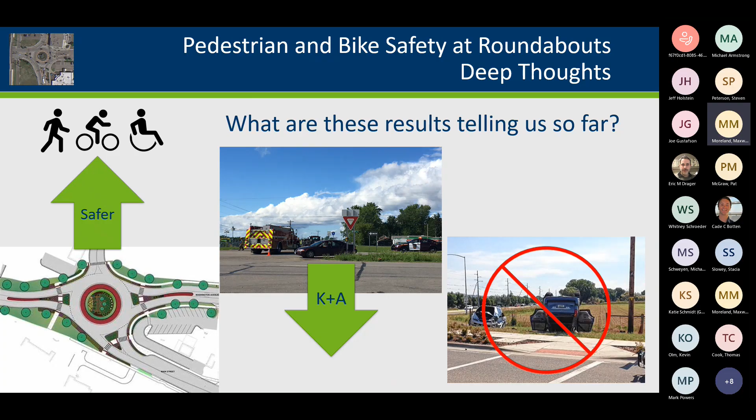So what do these results tell us so far? Generally, installing a roundabout is safer for peds and bikes. K&A crashes go down when you install a roundabout. And this thankfully is not from Minnesota - there have been still no multi-vehicle fatals at a roundabout in Minnesota.

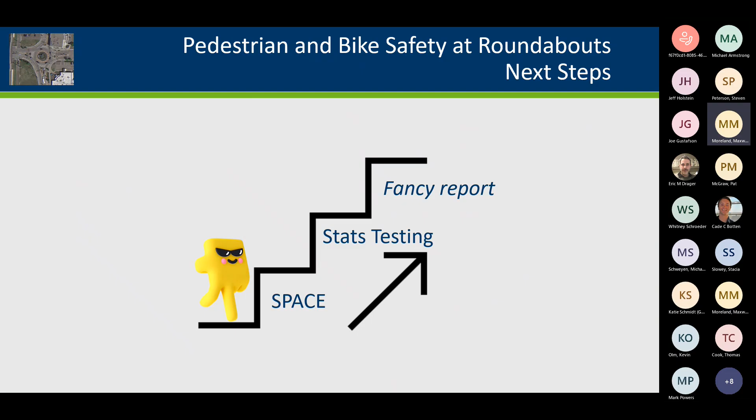Next steps: for space, I'm going to do a little more analysis and look at pedestrian exposure, statistical testing, and then write it up in a fancy report. So no, you don't get to go look at it on the traffic safety website right now - I don't have it ready like Max does.

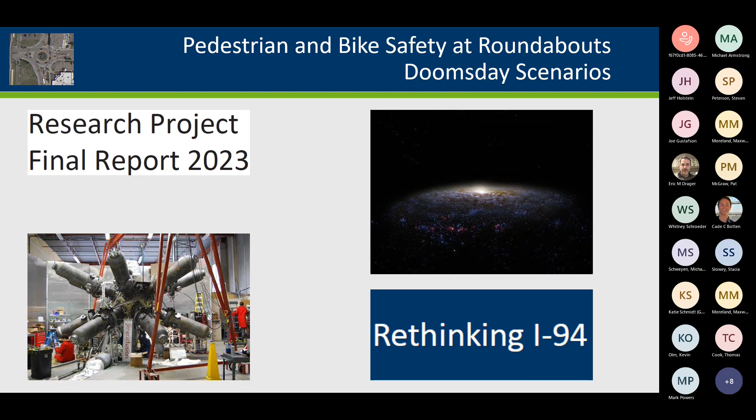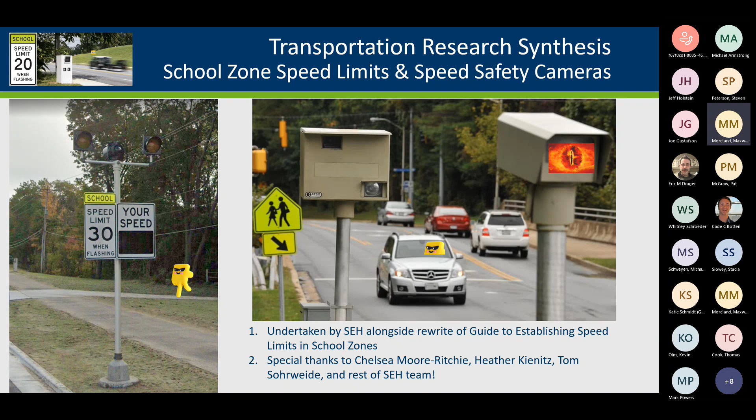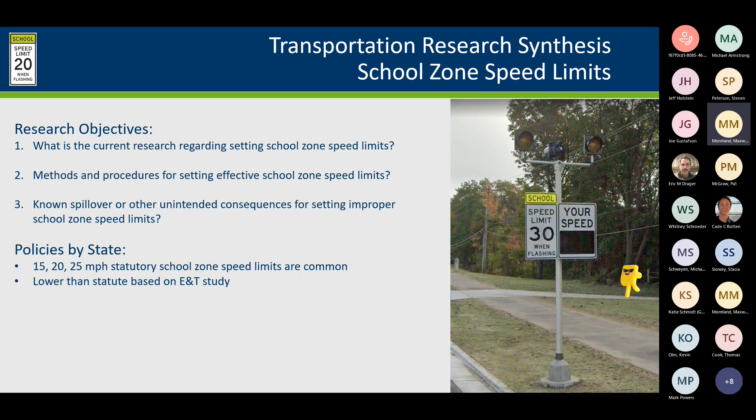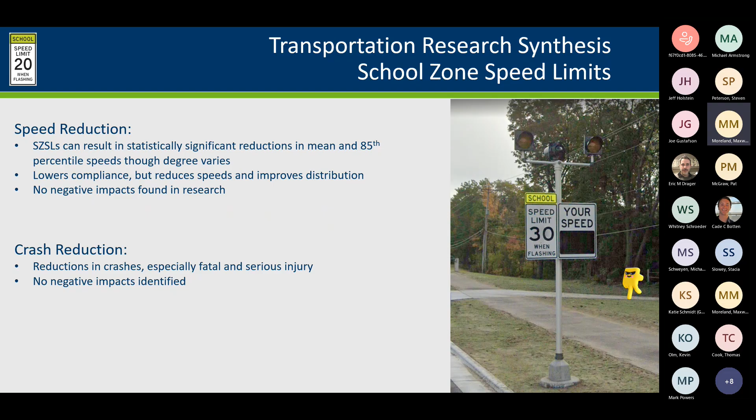Speed reductions - they did see a statistically significant reduction in the research in mean and 85th percentile speeds. It was 1 mile per hour, which I didn't think was a big deal, but Nate Drews told me that's actually really good to get a 1 mile per hour 85th percentile reduction. No negative impacts. And for crash reduction, again, they saw a reduction in fatal and serious injury crashes, and no negative impacts.

Additional areas of emphasis - you really want that speed differential between the speed limit and the school zone speed limit to be 5 to 10 miles per hour. That seems to be when they're most effective.

Speed buffers on high-speed roadways, which is something you can't really find much in Minnesota, but Texas does these a lot, where it's 65 and then 45 and then 25 over the course of a mile. And then layering of additional countermeasures, which in the school zone guide is really safe routes to school - go to safe routes to school, and when you've worked with them, then come do your speed limit.

So the conclusion: there's a positive yet modest impact on safety, combined with additional speed management countermeasures for your best results. This document is ready. It's TRS 2301 on the MnDOT Research and Innovation website.

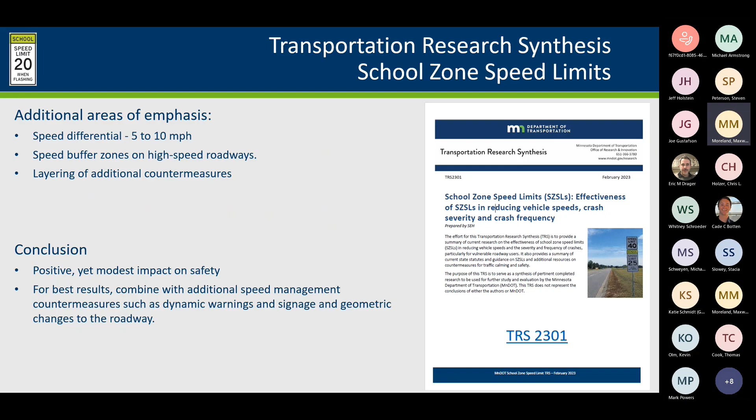Now, the boring topic, speed cameras - no one ever really cares that much about these. So pretty much the same objectives: are they effective, can they reduce the severity of crashes, and are there spillover effects? 20 states and about 150 communities in the United States have these.

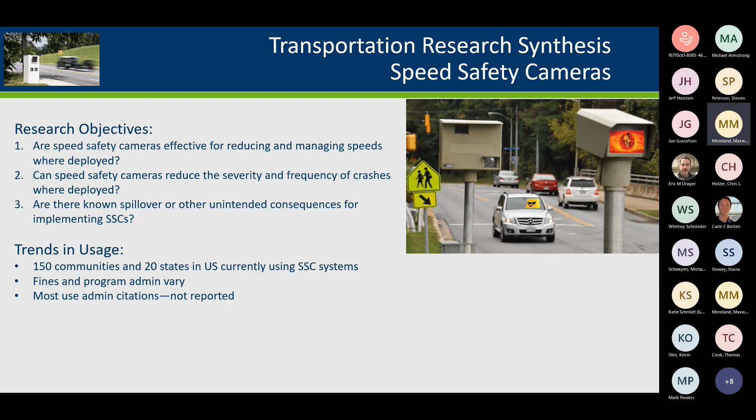How they administer those programs varies, and most use administrative citations so they don't go on your license - states, that is. So these crash reductions were very, very good, and the speed reductions.

Speed reductions first - they saw up to a 15% reduction in mean speed, which is frankly kind of mind-blowing. On lower speed roads, the threshold speed where people are going more than 10 over, they saw a 60 to 80% reduction. In school zones, a 50 to 60% reduction in threshold speeds, which feels really important to have fewer people going more than 10 over, and a 2 to 5 mile per hour reduction in mean speeds, which again is actually a very impressive number.

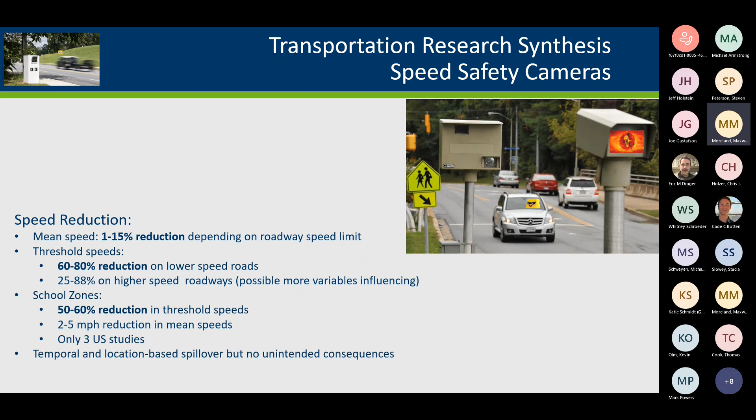This TRS is also out, and you can see some of the crash reduction numbers there - fatal and serious injury crashes, a 20 to 56% reduction for something that's relatively cheap and not geometrics. That's a very, very impressive number. So basically, these are very good at reducing crashes and reducing speeds, especially K&A crashes.

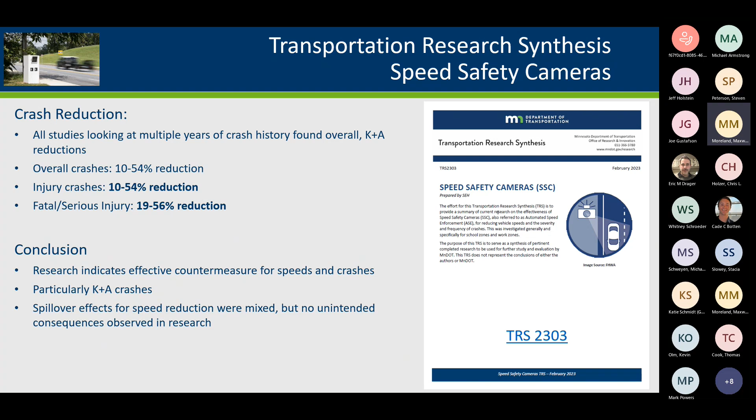Spillover effects - mixed. One weird case in Arizona, they found spillover effects 20 miles per hour or 20 miles away on the same highway. How they determined they were related, I still don't know, but it was reported that way.